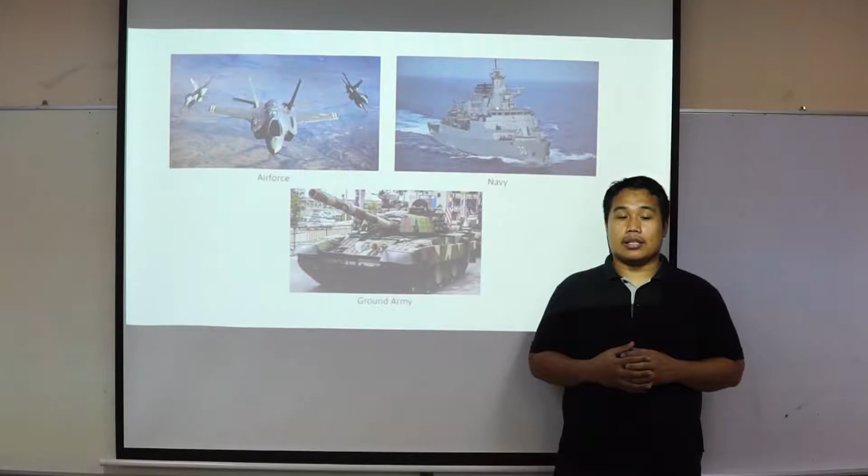My name is Zarif Atika Ismail, and our group has been appointed to do electromagnetic compatibility about military technology. If we look at military, there are three divisions: Air Force, Navy, and Army. In these military divisions, every division has their own EMC problems, their own EMI. In general, we conclude that every part has something similar to handle these problems. So our problems, solutions, and the companies related are all dependent on this single part that we focused on.

Let's talk about the military standards a little. If we compare it with commercial aircrafts, their needs for control of EMC is not so high compared to military. The reason being is because military faces a lot of different surroundings, for example in the sea, in the desert, or in the mountains. So every different condition causes different types of EMC. The earth that contains electromagnetic force sometimes causes disruptions in the equipment. So there are certain standards that militaries put to make sure their standards are met and the equipment can be used on the field and so on.

MIL-STD 461E is an example of military standards for any equipment. It is not exactly global, it probably applies to certain countries for this standard, but as a reference we use this as example.

There are four different types of standards that they look into: conducted emissions, conducted susceptibility, radiated emissions, and radiated susceptibility. So what is the difference? In a material, the greater the conductivity, the higher the frequency it can withstand. So that's about conducted emissions or conducted susceptibility.

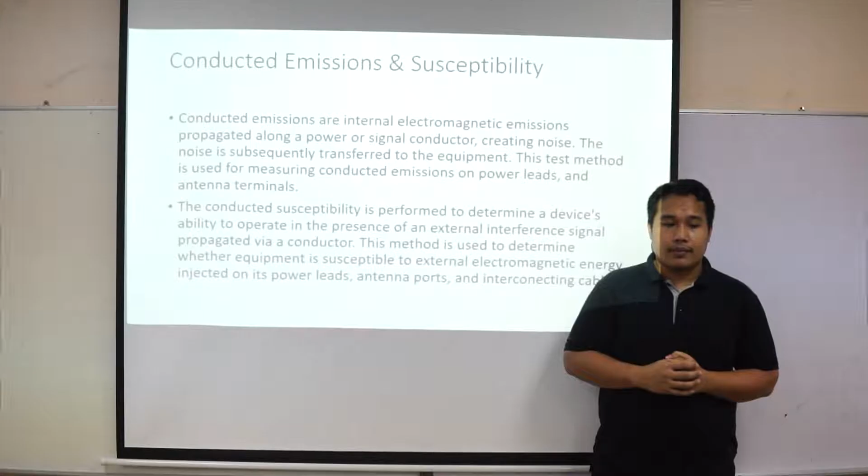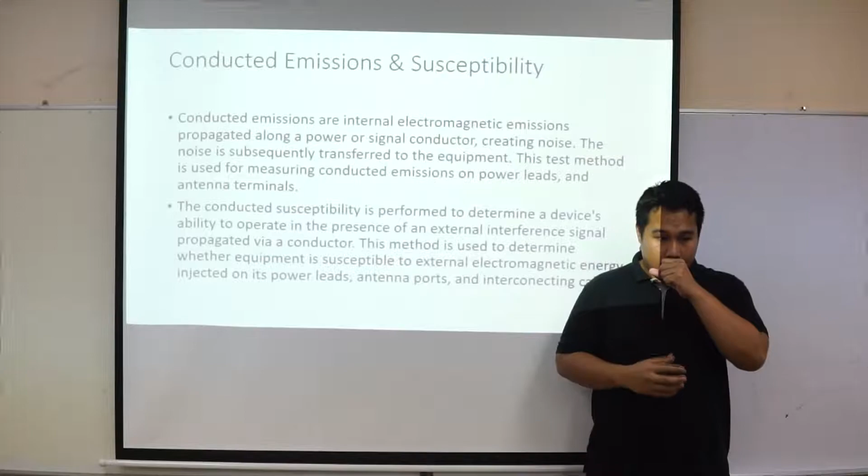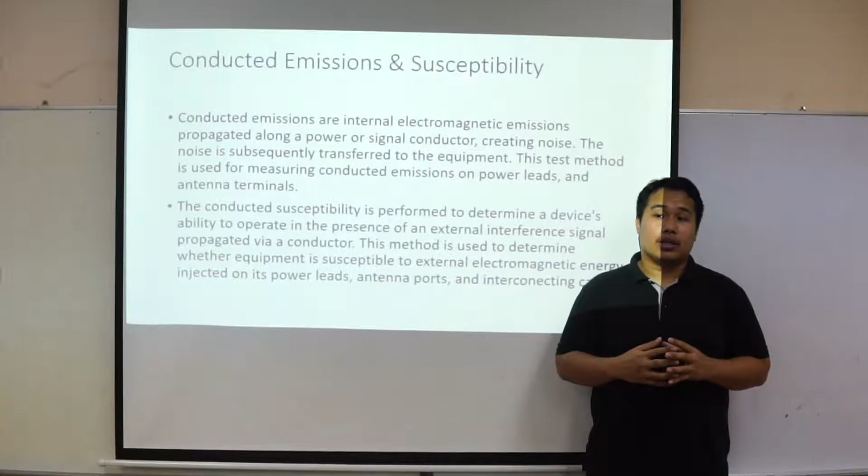Conducted emissions are electromagnetic emissions that propagate along the power or signal line that creates noise, meaning it's internal conducted emission. The noise is subsequently transferred to the equipment. Conducted susceptibility is performed to determine a device's ability to operate in the presence of external interference. So we understand two things: firstly, the emissions is from internal and the susceptibility is external. The military standard makes sure that these two standards are met before distribution, before selling, before application on their equipment.

Then the other two are radiated emissions and susceptibility. It's the same concept, internal for emissions and external for susceptibility causes. This test method is used to determine the device's ability to operate in the presence of radiated emissions. If there are disturbances within the equipment, these tests are made to meet the requirement before it is distributed or supplied to the military force. Carrying on, the radiated susceptibility test is performed to determine a device's ability to operate in the presence of external interference signal propagated via free space.

For example, we want to detect a ship from a distance using our radar system. If there is interference with that signal, we cannot detect the ship. Therefore, there are certain standards that the military has set so that radiated susceptibility is met before the equipment can be used. In the military, there are attacks to cause malfunction in equipment, for example the electromagnetic pulse bomb, which shuts down or disturbs the electrical equipment of the military.

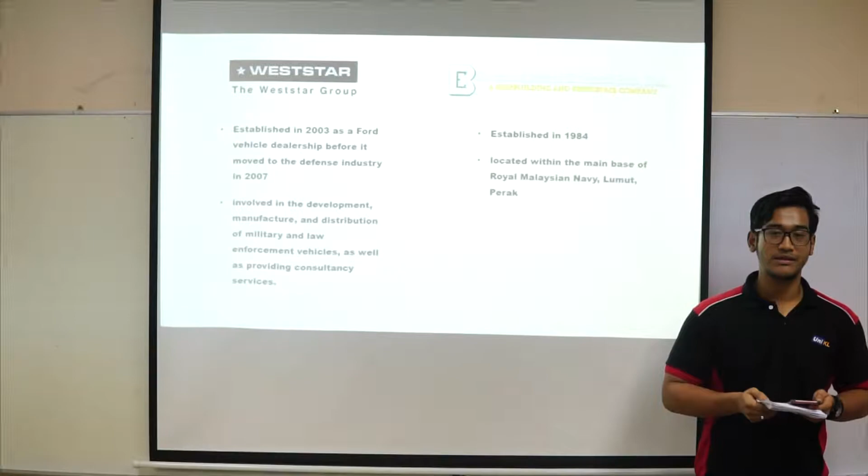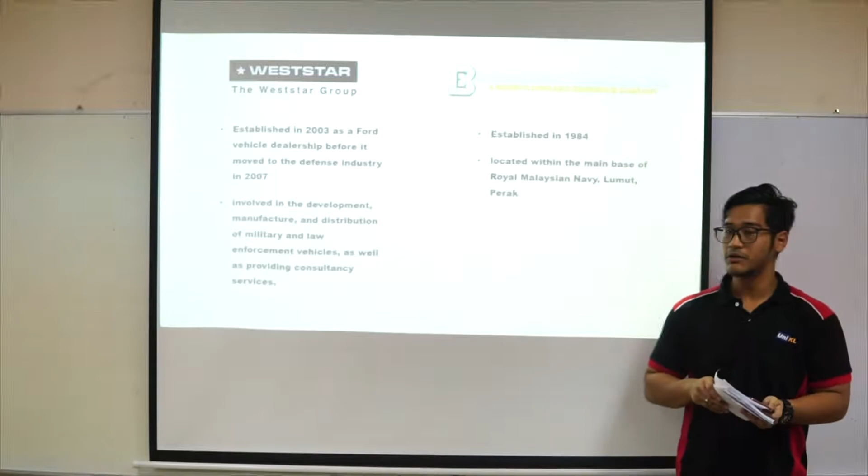After our research of more than a month, we have decided and finalized to choose the companies Weststar and Boustead Naval Shipyard. We chose these companies because both manufacture equipment for army and navy. Weststar's group manufactures equipment for army, while Boustead manufactures equipment for navy. Another reason why we chose both companies is because their headquarters are located in Malaysia. These companies also supply to other countries, such as South Africa and South Asia.

So the problem that we have discovered to solve in military technology is shielding caulk. What is shielding caulk? Shielding caulk can reduce application time and has excellent corrosion resistance, which is applied to the housing of electronic equipment for protection from EMI and electromagnetic pulse. Other than that, Faraday's cage can prevent frequency disturbance from EMI.

From that, the radar used in the military can get the accurate position, such as for trucks or air force in the military. The shielding caulk also ensures protection from EMI even under conditions of shock and vibration. This means this shielding caulk can ensure the equipment that the military uses can last long and cannot be damaged easily if something happens to the equipment.

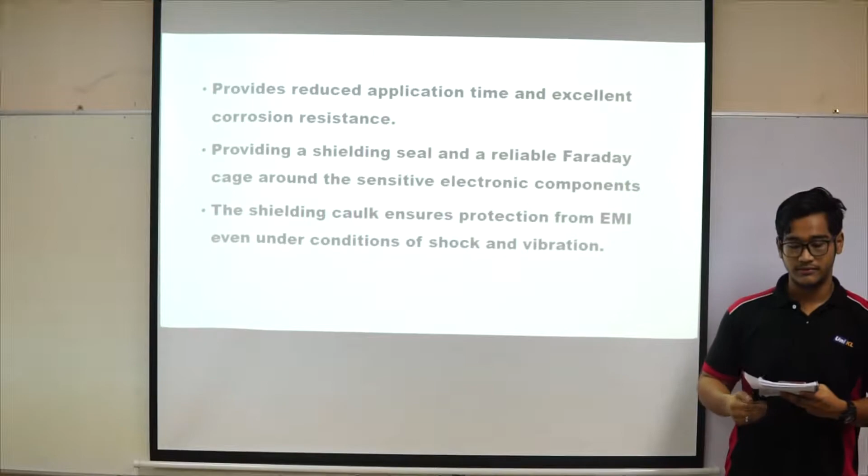Faraday cage is used to block electromagnetic fields. It is also used to protect sensitive electronic equipment from external radio frequency interference, known as RFI, such as a radio transmitter.

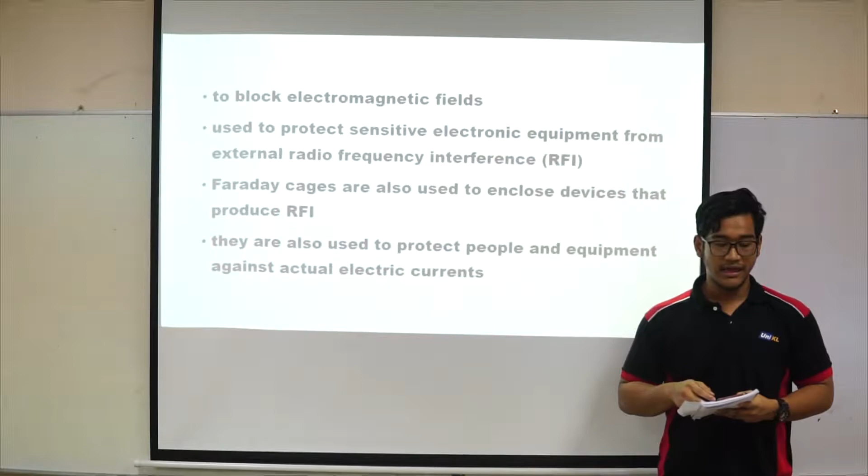Faraday cage can also prevent radio waves from interfering with nearby equipment. It is also used to protect people and equipment against actual electric currents, for example preventing the army in a truck or aircraft from lightning strikes and electrostatic discharge.

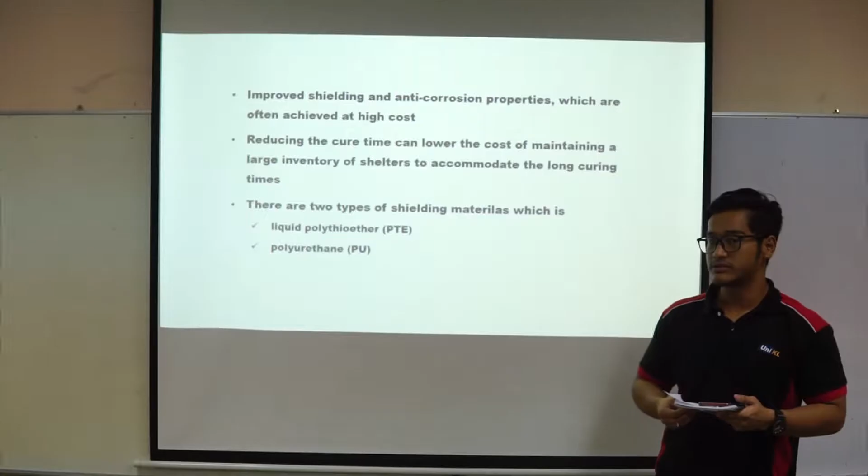We continue to military application. What is shielding caulk used for? Shielding caulk is used to improve shielding and anti-corrosion properties, which are often achieved at high cost. This means other equipment or material than shielding caulk is very expensive rather than shielding caulk.

Shielding caulk can be bought because its price is affordable in military use. It also reduces the cure time and lowers the cost of maintaining a large inventory of shelters to accommodate long curing times.

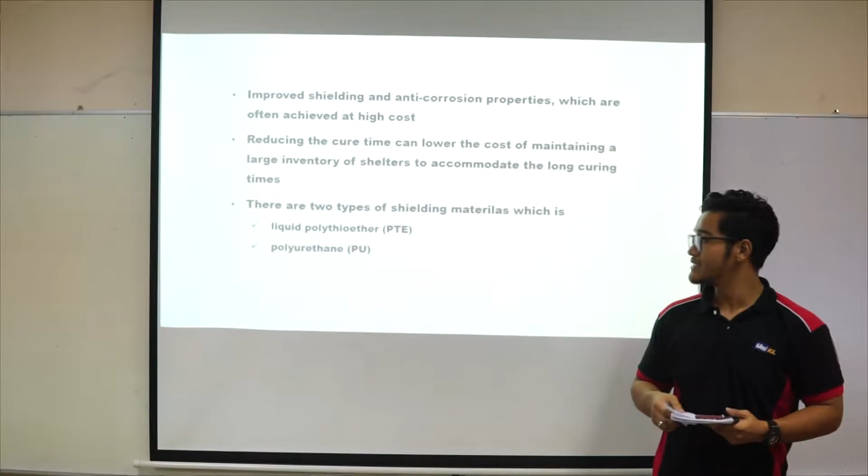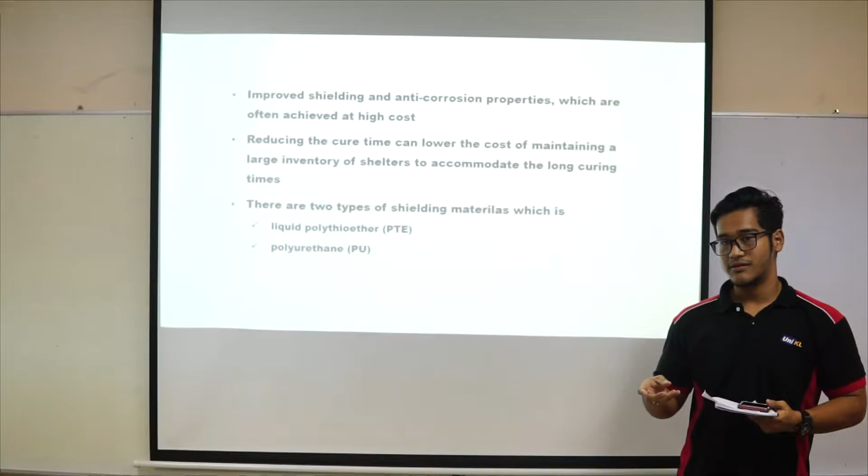There are also two types of shielding caulk used: liquid polythioether and polyurethane. These materials can resist water and solvent, and can be used at high temperature, meaning they cannot melt easily or be flammable easily, which could injure army personnel.

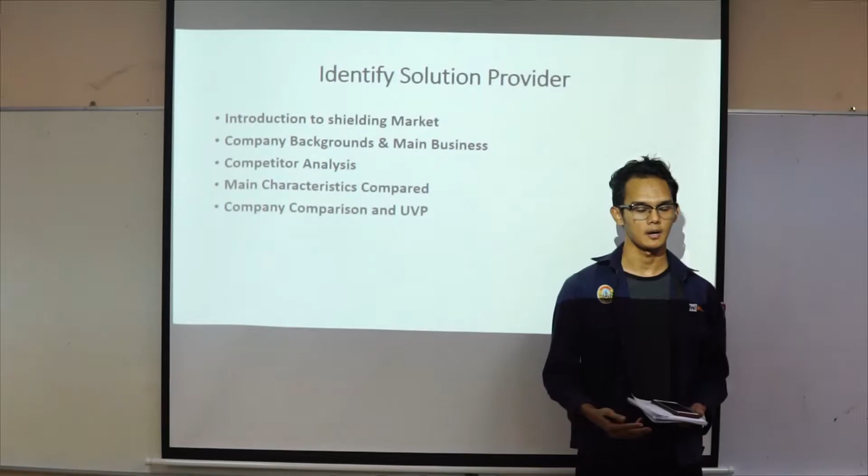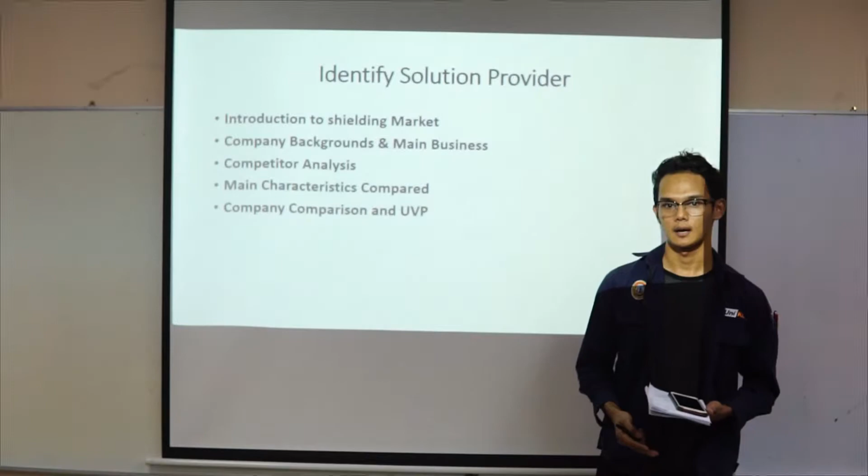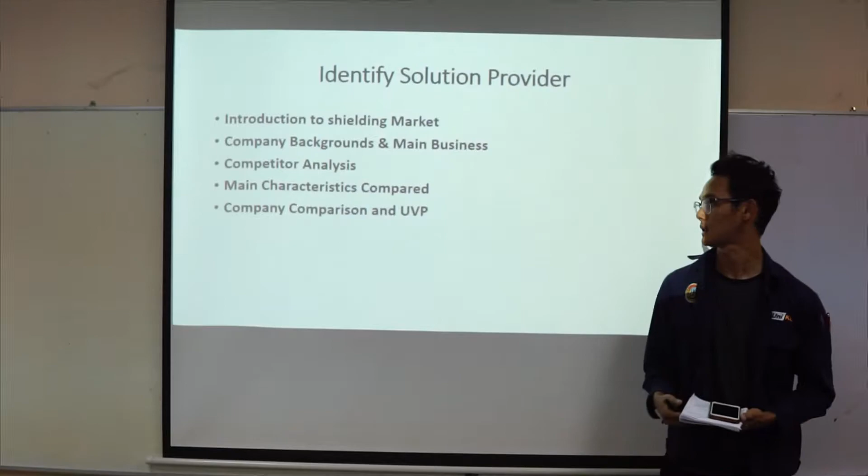In this topic we will present firstly the introduction of shielding market, explaining what types of shields we have today, and secondly the company background and main business. Then we'll explain what companies sell the shields we researched, third is competitor analysis comparing 3 companies based on our solution, fourth is comparing main characteristics and specifications of our product, and lastly which company is better.

First, we want to talk about the types of shields we have right now. Today there are many types of shields: tape shielding, bar type, foil shield, and lastly caulk shield.

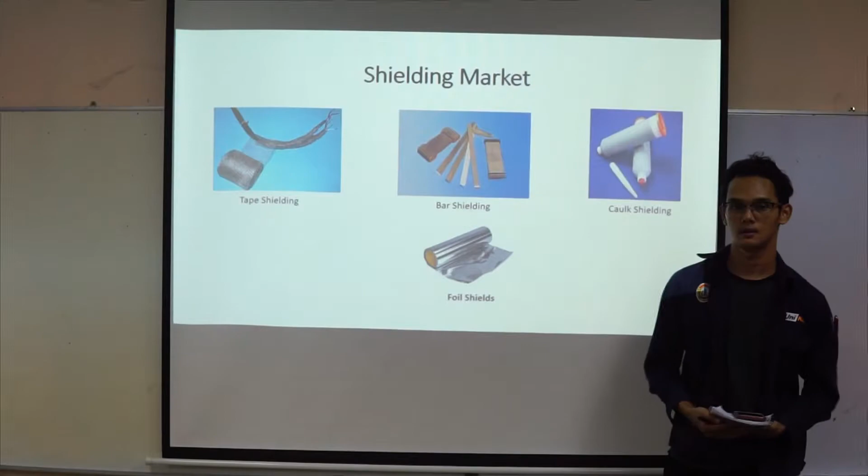From these shields, we researched which companies sell them, and chose the 3 biggest companies in the world that provide this equipment. First is Shielding Solutions, based in the US, with 30 years in the industry, covering aerospace, military, electronic, and automotive.

Next is Parker Company, based in the US. It has operated for about 100 years and has presence in 104 countries, including Malaysia, with locations in KL, Shah Alam, Melaka, Johor, Penang, and Sarawak. Parker specializes in military, aerospace, and electronic and electrical devices, and provides all the shield types we have today.

Next is Mast Technology Company, the last company we researched. It's based in California, USA, and develops EMI absorbing material for integration into military, automotive, electronic, telecommunication, and aerospace applications.

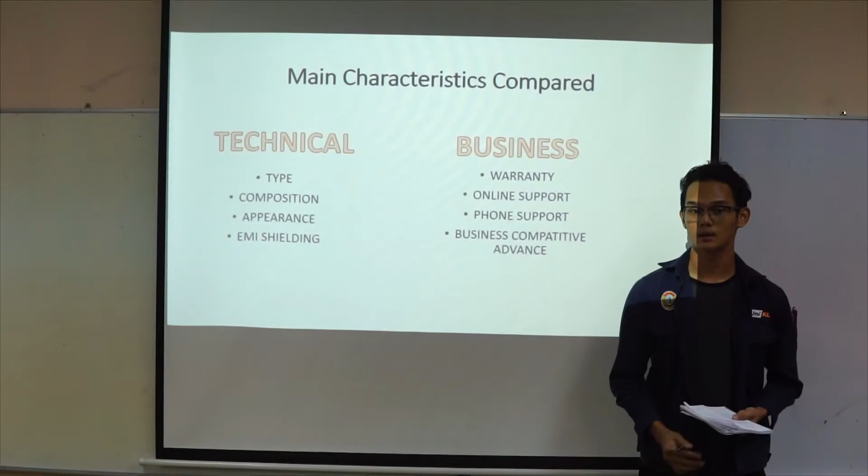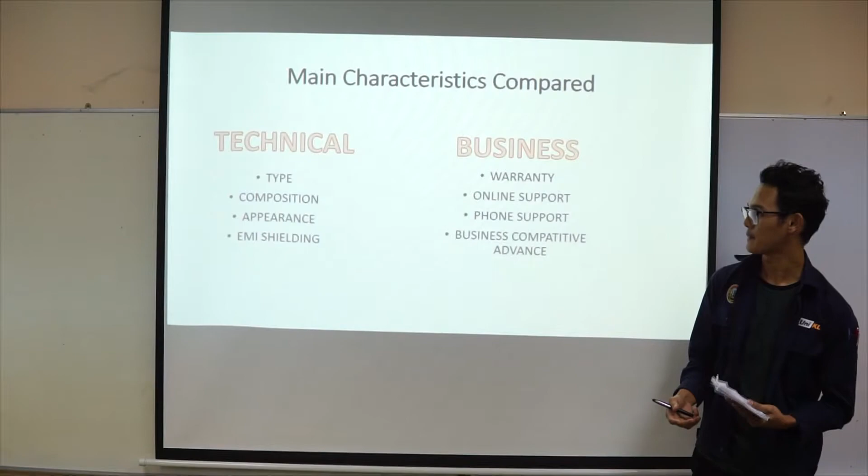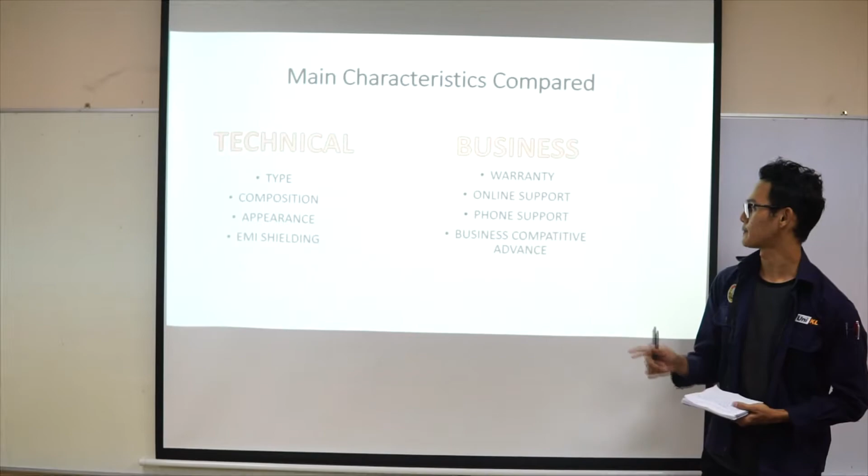This is the main characteristic comparison, divided into technical and business. For technical, we compared type of seal, composition, appearance, and the important EMI shielding. For business, we compared warranty, online support, phone support, and business competitive advantage.

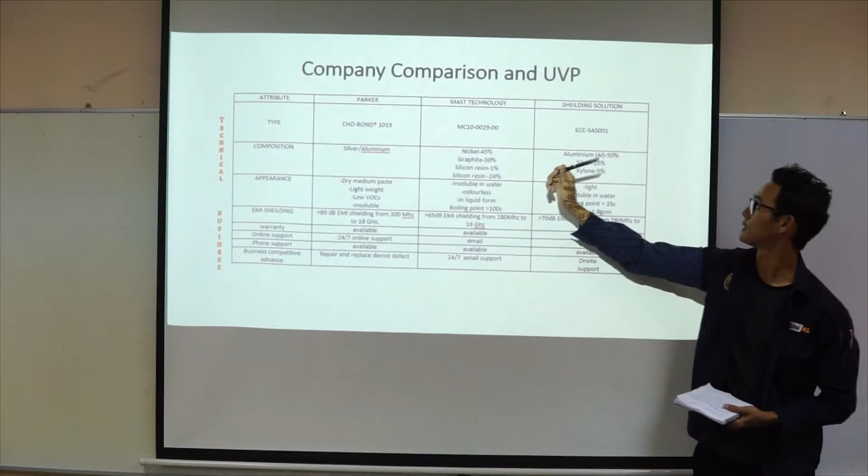This is a summary of our research, showing Parker company, Mast Technology company, and Shielding Solutions company. Here is the summary of the specification of the seal we chose, which is caulk.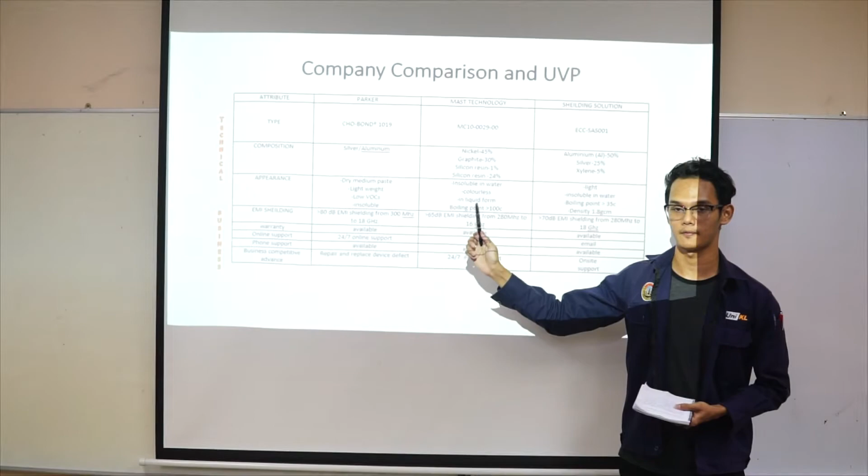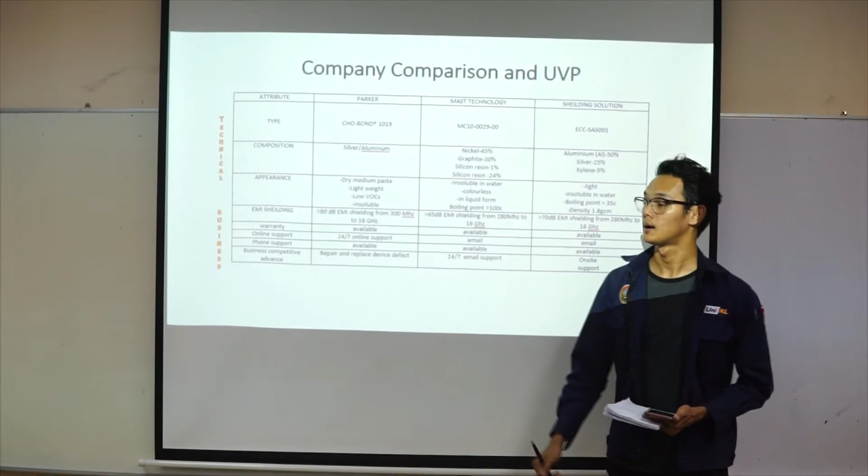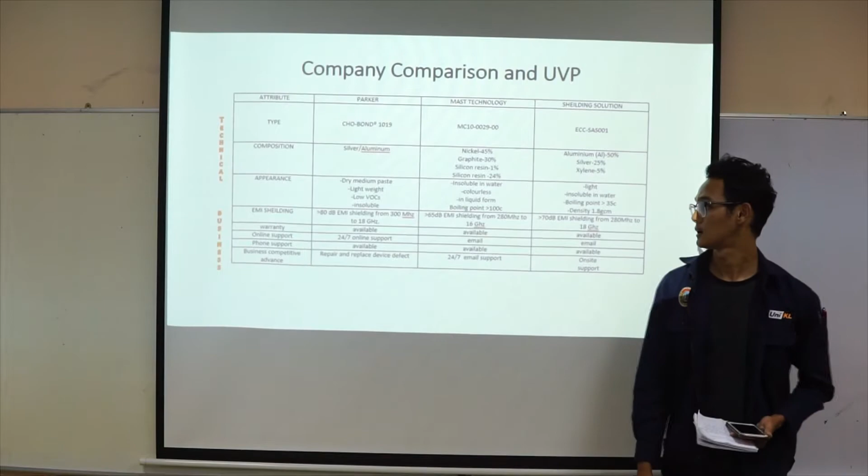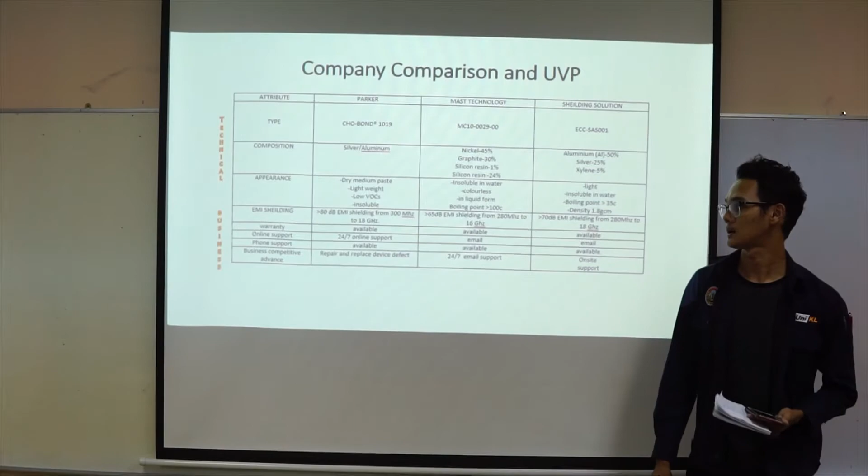Firstly, the Parker company has a material composition of silver and aluminium, and is lightweight and easy to handle compared to others. For EMI shielding, Parker produces 80 decibels, which is close to the military requirement, compared to the Mast Technology and Shielding Solution at 65 to 70 decibels.

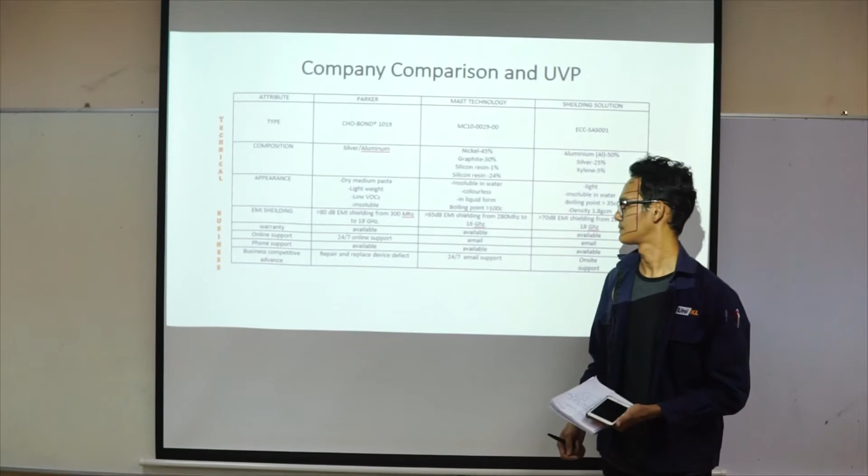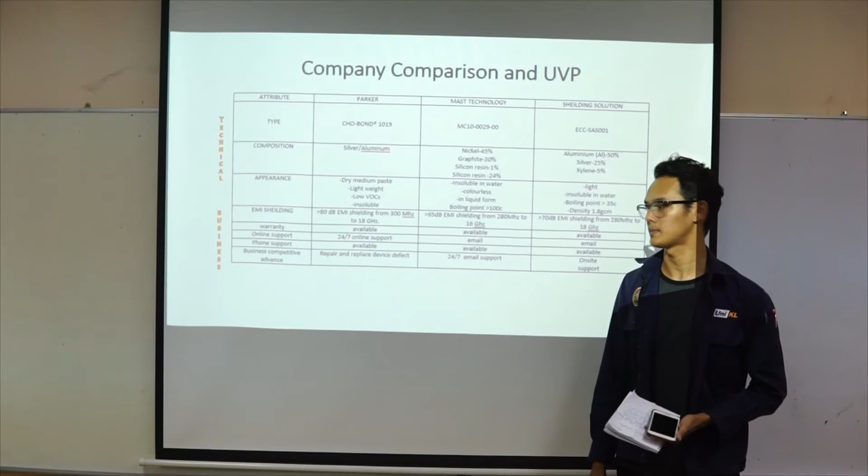The military requirement is about 90 decibels, so we can see that Parker company is closer to the military requirement. Next is warranty comparison: all three companies provide warranty for their products. From our summary, we decided to choose Parker company over Mast and Shielding companies.

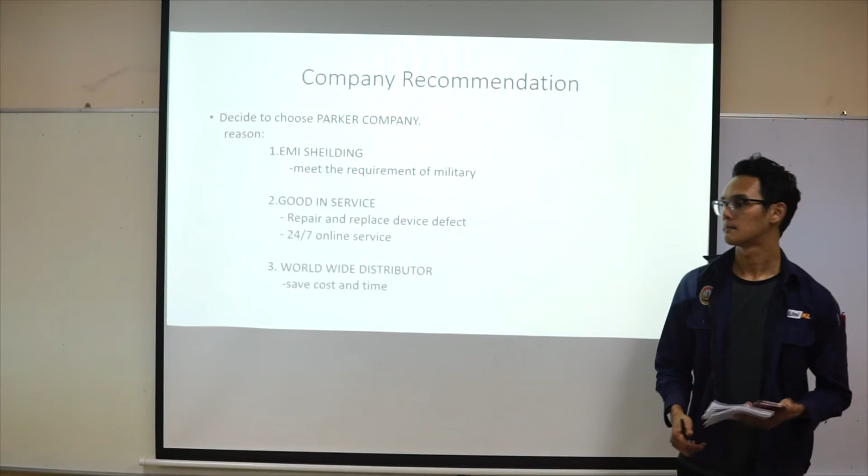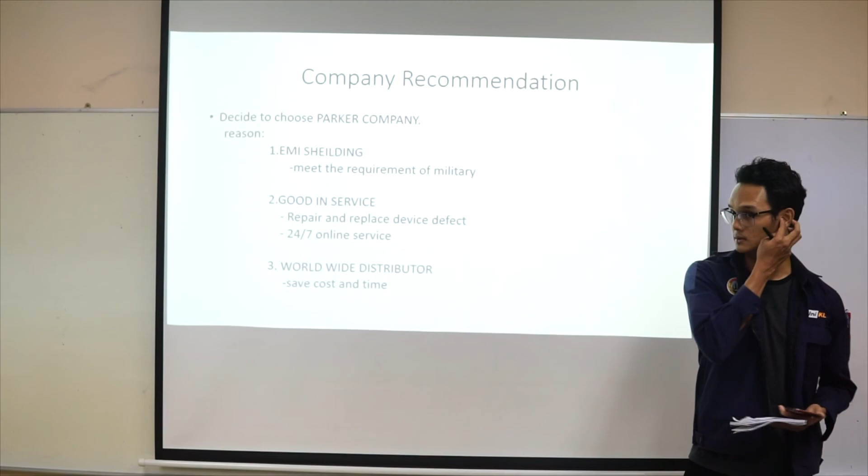This is because firstly, Parker's EMI shielding is closer to the military requirement. Second, Parker provides good service like 24-hour support, making it easy for customers to contact them. Third, Parker has a worldwide distributor, including in Malaysia, so we can save cost and time ordering their product. From this we decided to choose Parker company as our solution.

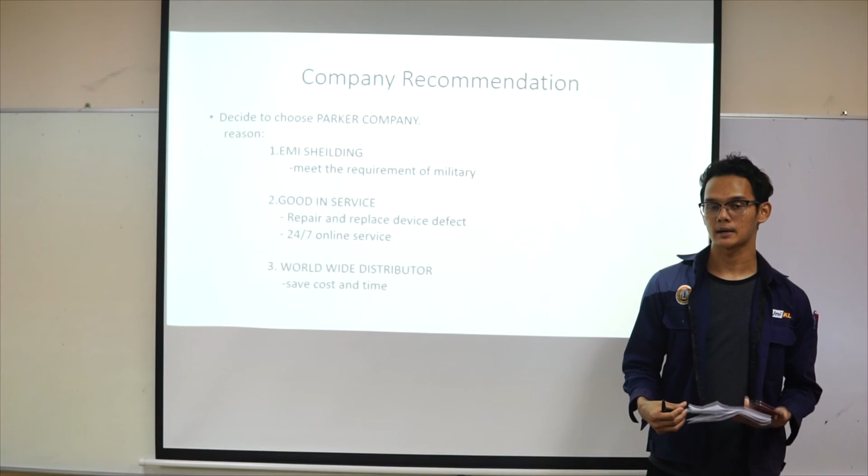So we have chosen Parker company as our solution.